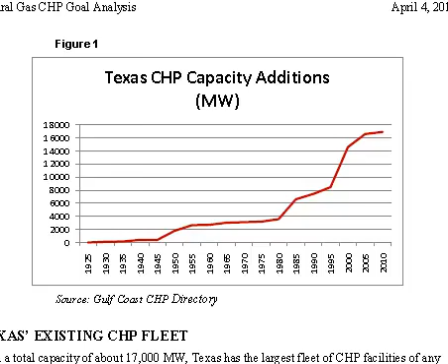And what's neat about these things is that they comprise a very large percentage of the overall generation capacity in Texas. The Texas CHP capacity additions started out in 1945 and just hit 2,000 units around 1950. Then there was another spurt in 1980. They went up to 4,000 units, and then by 1995 there were over 8,000 of these distributed generation systems in operation. And since 2002, it's just skyrocketed.

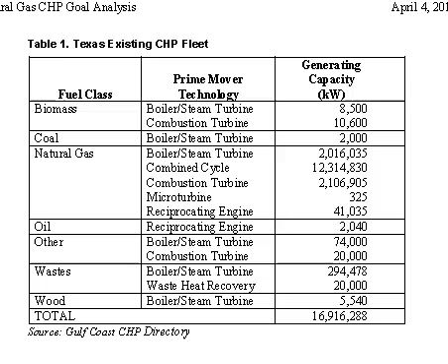The natural gas generation capacity in kilowatts produced by a combined cycle system is 12,314,000. And just to put that in perspective, the overall total of all CHP fleet systems is 16 million. And what I'm going over here is all the different kinds of distributed generation systems that are in commercial facilities. Of the 16 million kilowatts of generating capacity, 12 million of that is from natural gas.

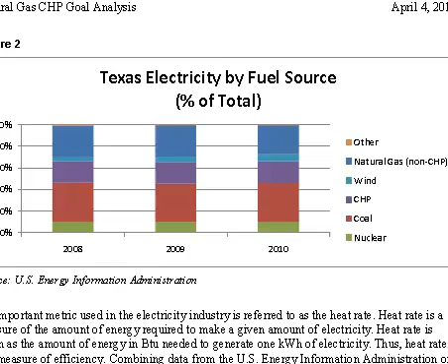And as far as CHP systems, as you can see, that's the purple, and the purple is getting close to being equal to the non-CHP natural gas generation systems. And these are the generation facilities that generate electricity for all homes and small businesses throughout Texas. So we're saying that CHP systems are getting close to equaling that.

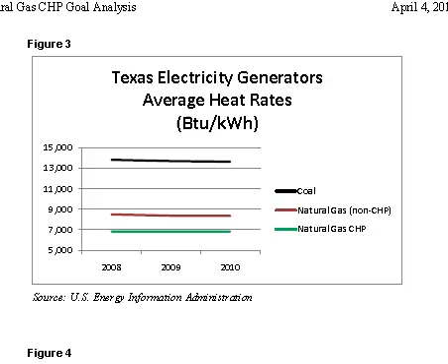Now, Texas electricity generators, the average heat rate, and heat rate is the amount of energy it takes to convert natural gas to electricity. Natural gas non-CHP, you can see, is almost approaching 9,000, but natural gas CHP is at 7,000. And this just means that distributed generation systems on-site at the facility are much more efficient than natural gas generation facilities that send power through power lines to homes and small businesses.

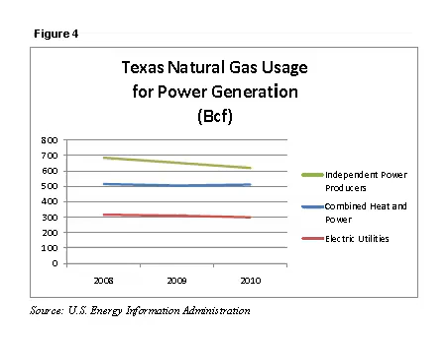Now take a look at this. Texas natural gas usage is going to be 500 billion cubic feet by combined heat and power distributed generation systems. This is 200 billion more cubic feet than traditional electric utilities. Now the Texas electricity load is expected to increase to 500 million megawatt hours by 2025.

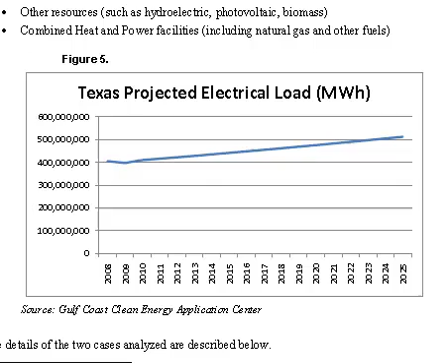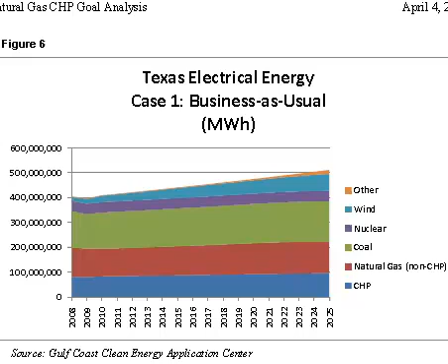So the goal here is to get these distributed generation systems, or CHPs, up to 35% of total generation among all other sources. So if you look at this graph right here, it's showing all the different sources: other, wind, nuclear, coal, natural gas, and CHP. CHP is the blue one at the bottom. It's relatively small compared to the others. Although it's beating other, wind, and nuclear, it's still fairly small.

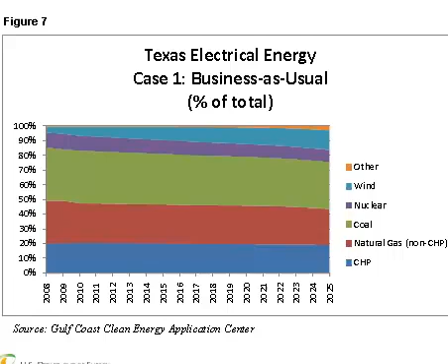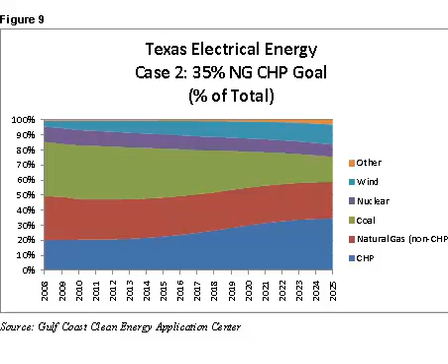And as you can see again, it's going to be the primary source of electricity in Texas compared to all the other generation facilities out there. It's going to be wind, nuclear, coal. It's natural gas, on-site electricity generation.

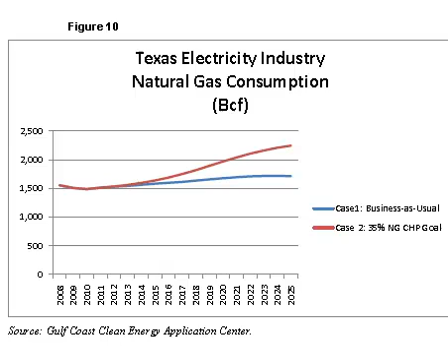Now you're also going to see natural gas consumption increase by a third from the business as usual case study to this 35% natural gas CHP goal. And this will have a total effect of consumption of 3.3 trillion cubic feet of natural gas. And if you look at this from a revenue standpoint, it stands to give the state of Texas $14 billion in increased production. And from this revenue, you'll see severance taxes come off of this, which will help the state.

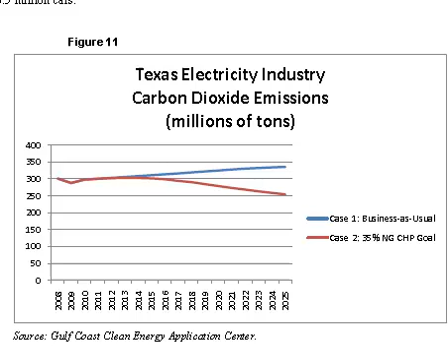And in fact, since we have the best record in using these CHP units, we're a case study for other states throughout the United States to do the very same thing. And we have a huge supply of natural gas in this state, so there's a lot of good things that could come from this. Now you're also going to see carbon dioxide emissions go down. You're going to see sulfur dioxide emissions go down significantly.

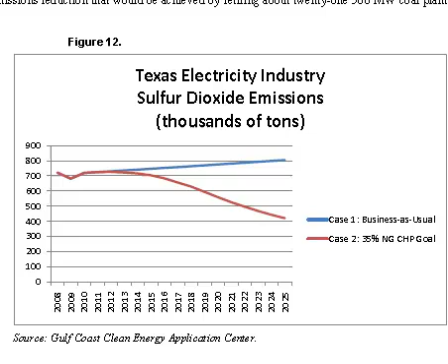This will have a double-edged sword here. Not only is it going to bring revenues to Texas, it's going to have the effect of meeting the EPA's goals of reducing some of these dangerous pollutants and emissions, and some non-dangerous ones that the EPA still wants us to reduce. We're going to reduce them anyway through the means of implementing these CHP on-site distributed generation systems.

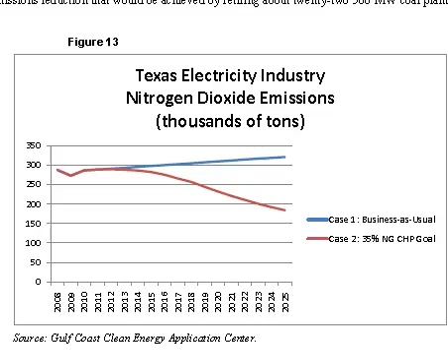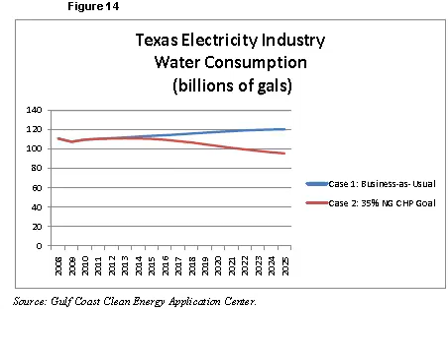Nitrogen dioxide emissions are going to go significantly down, and it's going to be a steady decrease from today until 2025. It's not just going to happen in 2025. There's going to be a steady decrease in all these pollutants over time. Water consumption will also go down. Electricity generation uses a lot of water, and through these systems you won't have that very valuable, these days very valuable natural resource of water being wasted like it is now.

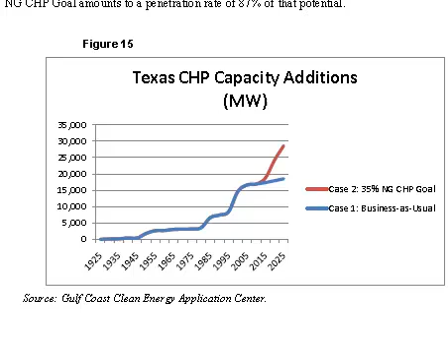Also, megawatts of capacity in Texas, you're going to see a huge increase in megawatts of capacity in Texas through the use of these CHP on-site distributed generation systems. And it's going to be a huge spike, as you can see in the graph, if you compare business as usual and the use of these CHP systems.

Okay, now this is the last thing we're going to talk about. This is a really interesting chart here. It's just showing you the different fuel sources for generating electricity in Texas. And if you look at natural gas, which is primarily non-CHP natural gas fuel source consumption in generation facilities, this fuel source is going down each year. We're using less and less natural gas for generating electricity.

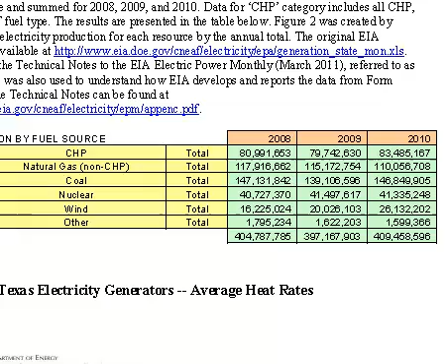But look at the CHP systems. From 2008 to 2009, it went down a little bit, but in 2010, it went up significantly. And the goal is 35%. So we're likely going to see the natural gas CHP fuel source go up each year significantly until we actually surpass the natural gas consumption in your traditional electricity facility. So this is very interesting. We're seeing signs that CHP systems are taking over in Texas, and this can only be good for Texas.

As you could see from the graphs, it creates several different benefits, such as reducing emissions and pollution, more efficient creation of electricity for businesses, and more revenue in the form of electricity generation being produced through the use of natural gas. And this will make it much easier to do that.

And in the case that natural gas becomes too expensive, if that were to ever happen, a distributed generation system can easily be retrofitted for multiple different fuel types. And that's what we talked about in the beginning of the video, the Bloom Energy Box. It's very compatible with many different types of fuel sources. So I hope this helps give you an idea of where Texas electricity generation is going, and I think it's going in a positive direction.